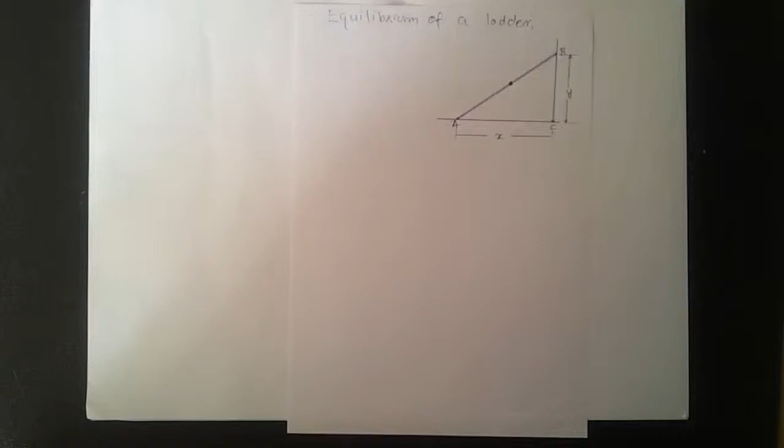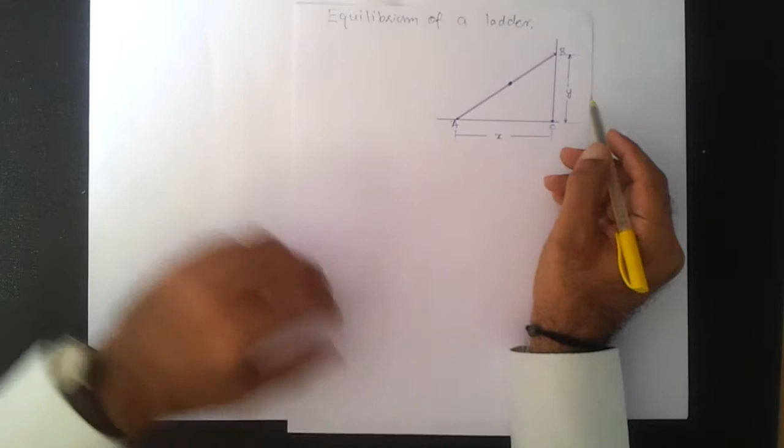This video is on equilibrium of a ladder. Let us say we have a ladder AB resting against a wall, and it's resting at point B and resting here at point A on the ground, right? And this ladder is in equilibrium, meaning that it is neither sliding down along the wall, nor is it sliding along the ground.

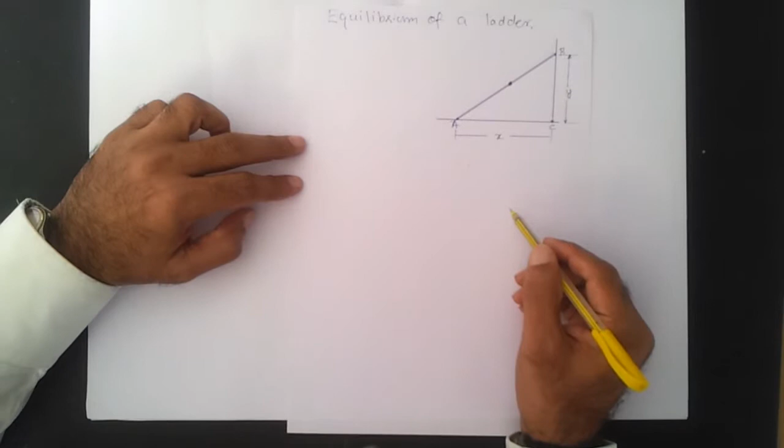So it's in equilibrium, and we're going to look at the various forces which come into play for the equilibrium of the ladder, right? Okay, before that, we need to understand the concept of forces, and particularly concurrent forces, right? The equilibrium of a ladder is a good example of concurrent forces. So let's first understand what we mean by concurrent forces. So let me show you this.

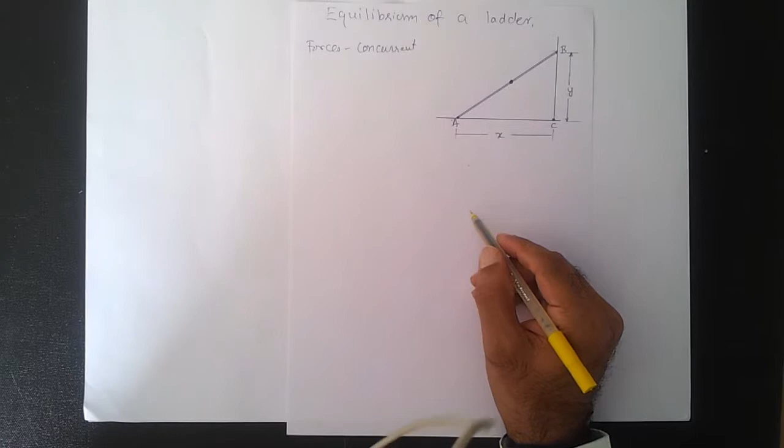Let us say we have an object, a wooden block placed on a table, right? So this is a table surface on which we have a wooden block, and say there are a number of forces acting on it, forces F1, F2, F3 and F4. Of course, their directions are different and there are various magnitudes. Now, what we see over here is that if I extend the line of action of all the forces, they pass through a common point, right?

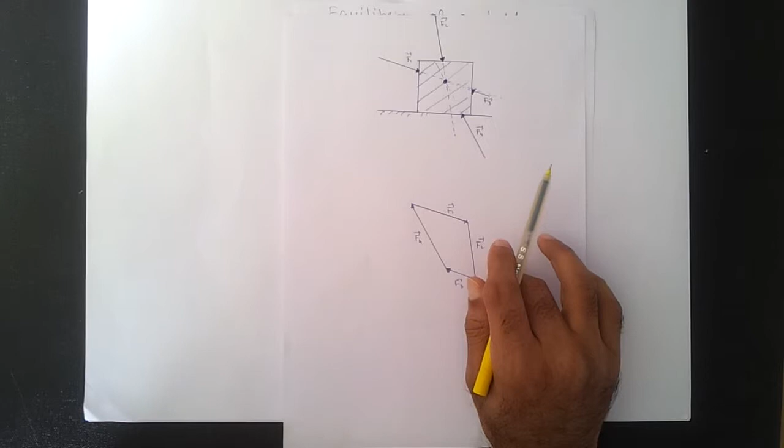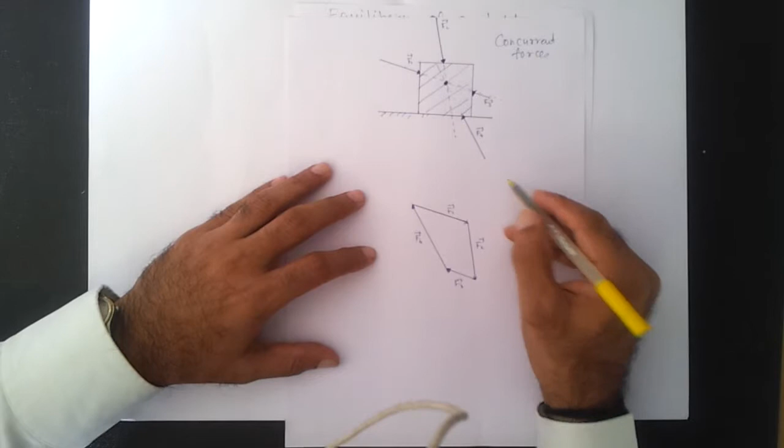And such forces are known as concurrent forces. Forces whose lines of action pass through a common point are concurrent forces. And if I show them in the form of vectors, let us say this force F1, I take care of the direction as well as the magnitude, and if I show all the forces in sequence one after the other, and if they complete a polygon, then these forces are in equilibrium.

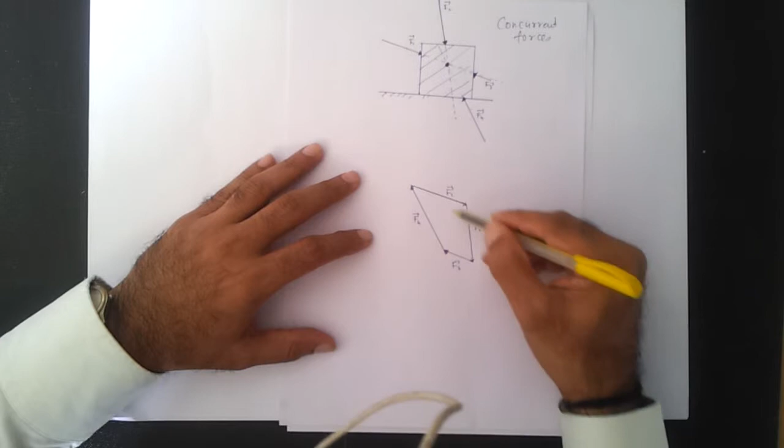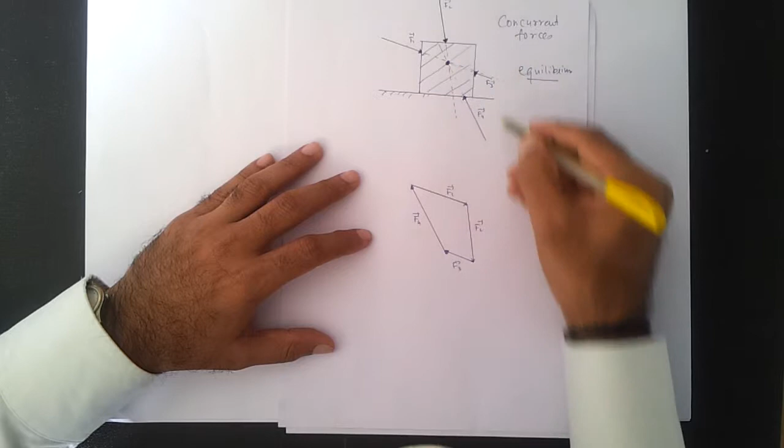Right? So this is the background we require, understanding concurrent forces, and then we'll shift back to equilibrium of a ladder. So I want to understand various forces acting on this. I know that these forces, when put together, are in equilibrium. First, let us begin by trying to understand which are the various forces which come into play. So I'll first mention the forces that come into play.

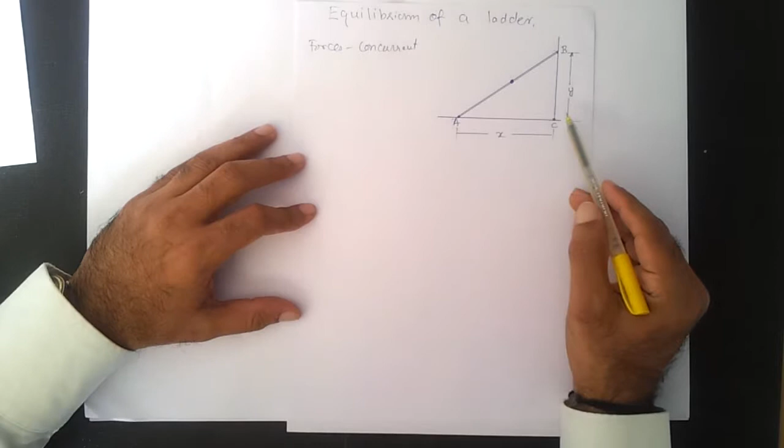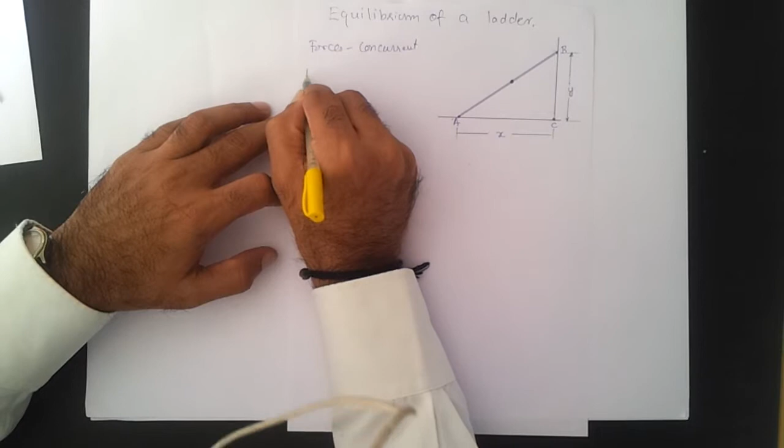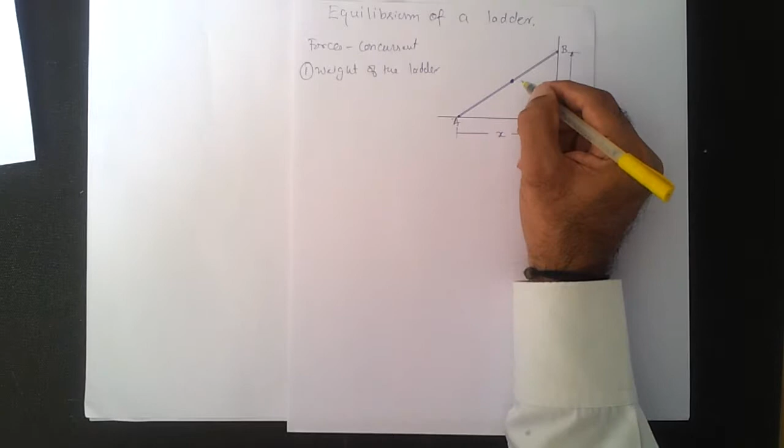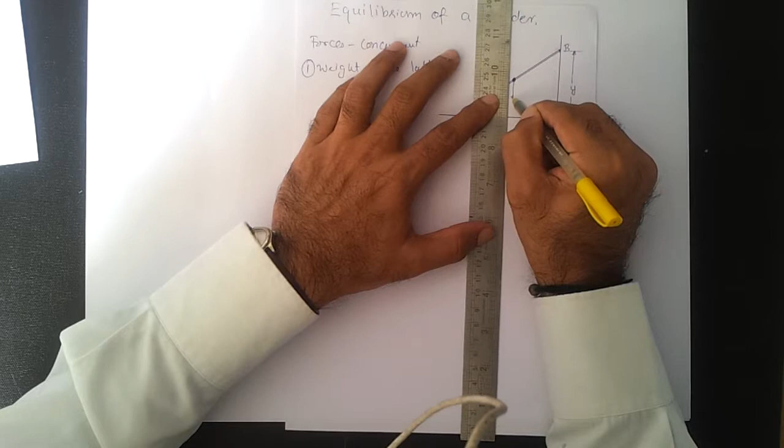One force is the weight of the ladder, quite obviously, right? And the weight will act in the downward direction from the center of the ladder. So this would be the direction of the weight, and this would be the line of action of the weight force. Second, reaction from the wall, and third, reaction from the ground. So these are the other two forces which come into play.

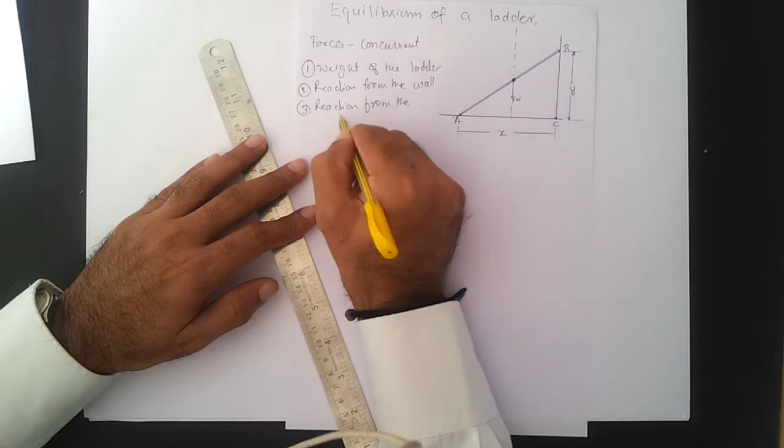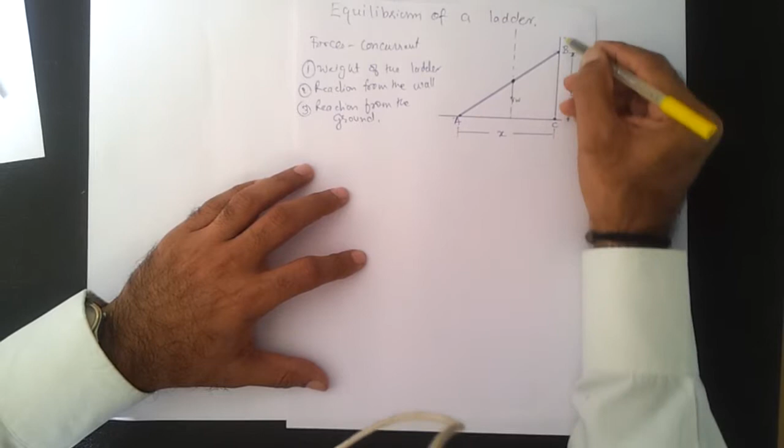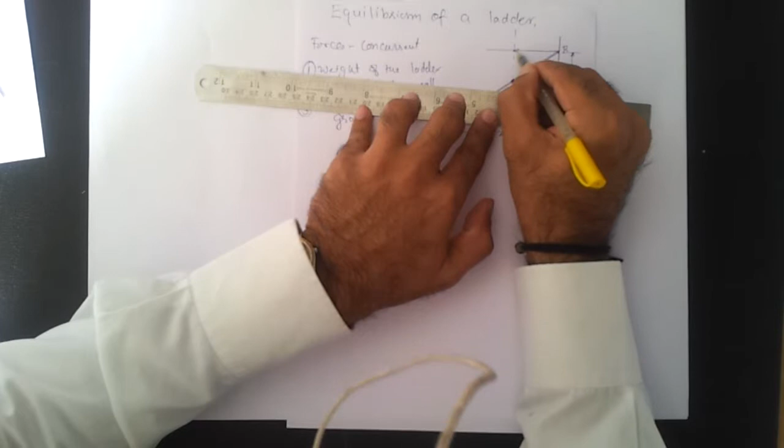Since this ladder is resting against this wall, the wall is going to offer a reaction. Similarly, the ground is also going to offer a reaction. We are going to assume that this wall is smooth, so there are no frictional forces which come into play, and hence the reaction from the wall will be perpendicular and horizontal, right? So this is the direction in which the reaction of the wall will act. Let us call this reaction RB. Right, so we now have the line of action of force RB.

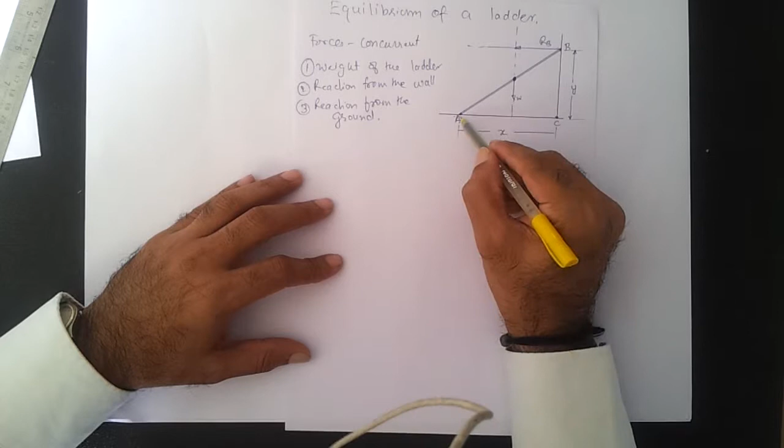The last one remains reaction from the ground. So this ground is going to offer reaction. Now, what will be the direction of this? Since the ladder is in equilibrium, these are concurrent forces, so they should pass through a common point. Hence, we can say that the direction of the reaction from the ground will be in this direction. So this will be the line of action of the force, and let us say this is the magnitude. So this is RA. So these are the three forces which come into play.

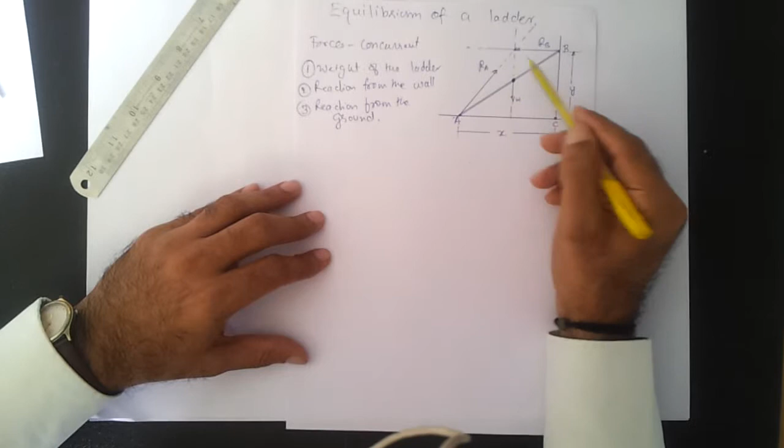Now, as we said earlier, concurrent forces, when they are in equilibrium, if I draw them in the form of vectors, they should complete the polygon. In this case, since there are three forces, they will complete a triangle. So let me show the three forces in the form of vectors. Let's not worry about the magnitude as of now. Let us just look at the direction.

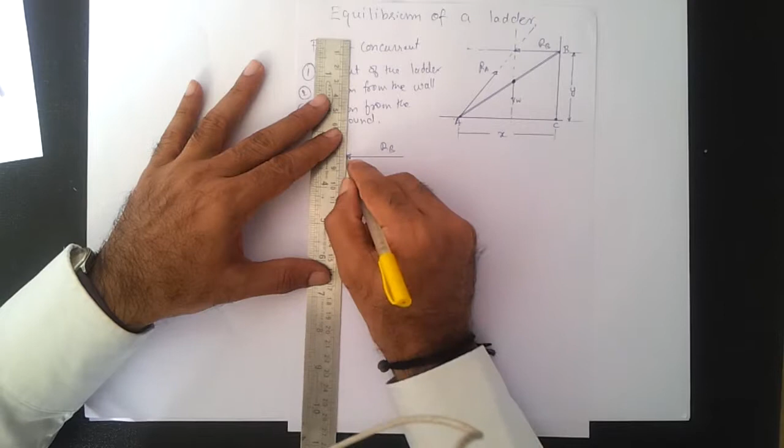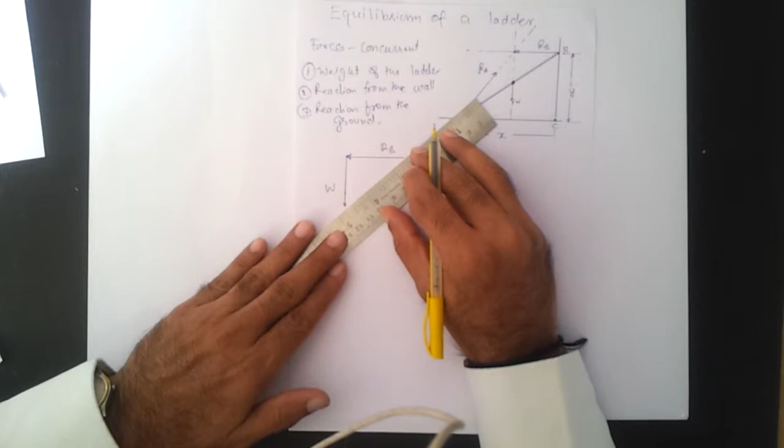So let us say this is RB, the horizontal. The weight acts in the downward direction, so this is W, and RA will be such that it will complete the triangle. The ladder is in equilibrium, and all these forces have to be in equilibrium. So this will be RA, right? So this is how the vector diagram looks.

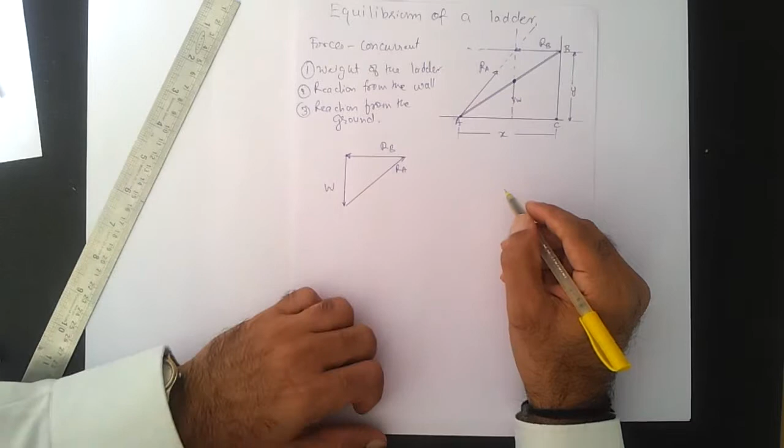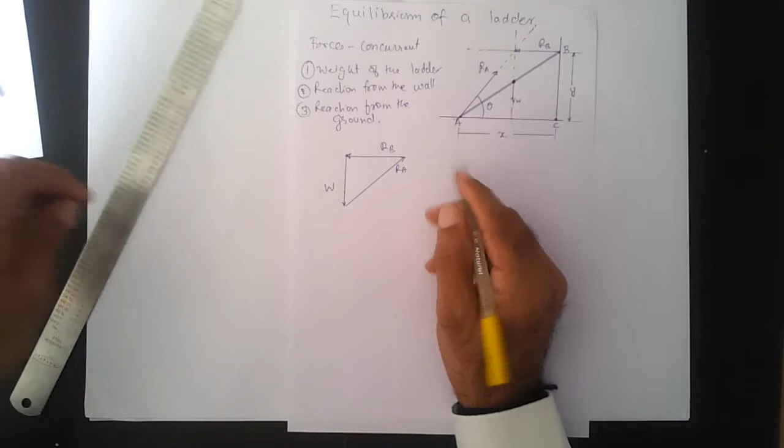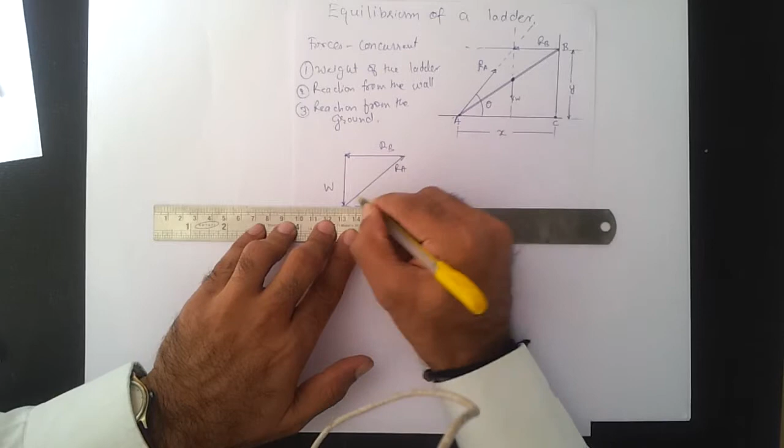Let us say the angle that RA makes with the ground is theta. So in that case, this angle will also turn out to be theta. Okay. Now if I look at this diagram, I can conclude a few things. One is that this angle is 90 degrees, so I can conclude that RA squared is equal to W squared plus RB squared, right? So this is equation 1.

Secondly, tan theta is equal to opposite side, that means W, upon adjacent side RB. So I get tan theta is equal to W upon RB. Okay. Let's go back to this diagram. If I look at theta, and let me call this point D and this point E, and look at triangle ADE.

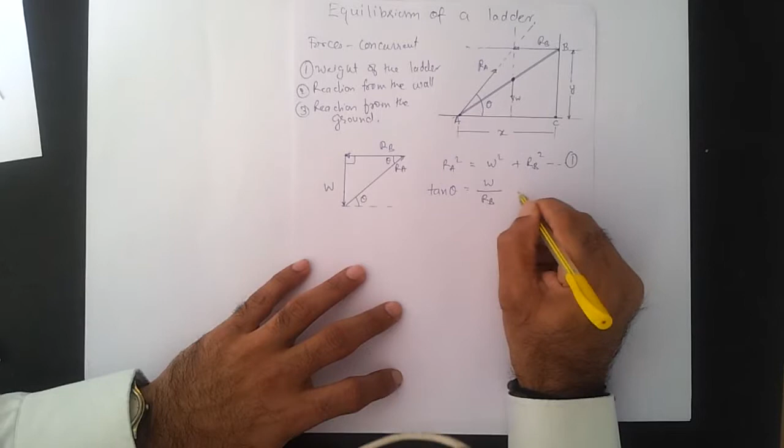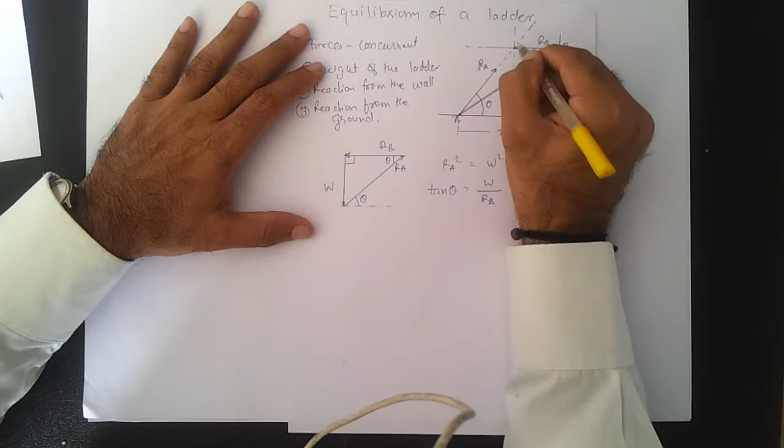In triangle AED, tan theta is equal to DE upon AE. DE will be equal to BC, and BC is equal to y. For AE, W will act at the midpoint, so this will be half of x, so I'll get x by 2. And therefore I can write down tan theta is equal to 2y by x, right?

And therefore if I summarize this entire discussion, I get equation 1, and equation 2 can be written as tan theta is equal to W upon RB is equal to 2y upon x. So this is now my equation 3, and this is equation 1. So equation 1 and equation 3 will help me get any unknown.